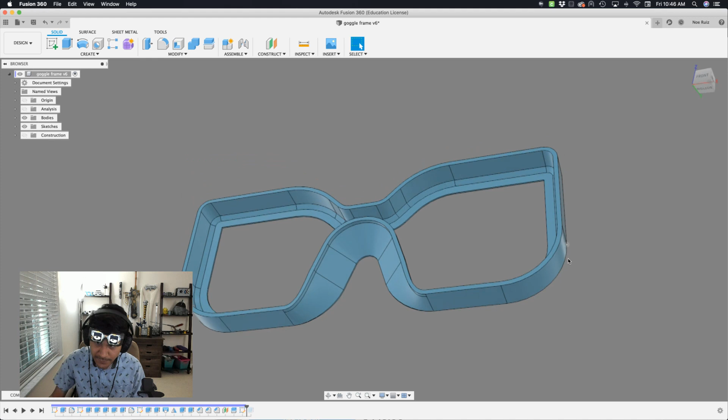So let's jump right into Fusion. All right, here I am. So here's the design that we came up with, and you can use this to create a pair of spectacles or an enclosure for a pair of eyes or something.

But you can see here I have some straight edges that's going to print flat, and then it doesn't need any support material because this is an angle where FDM 3D printers can totally handle it. It's at a 45. Really, really cool. So let's start creating our frame.

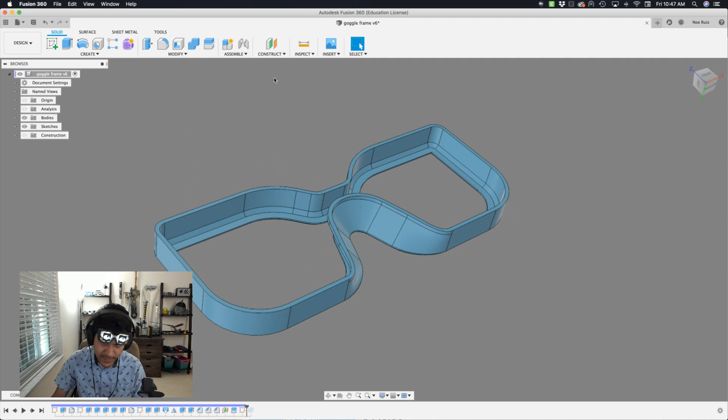So I'm going to start with a new design, and I'll go ahead and create a new component. Let's call it frame. And it's just going to be a single part inside a frame. Let's create a sketch, and I'm going to draw right on top using my top view, looking at it down.

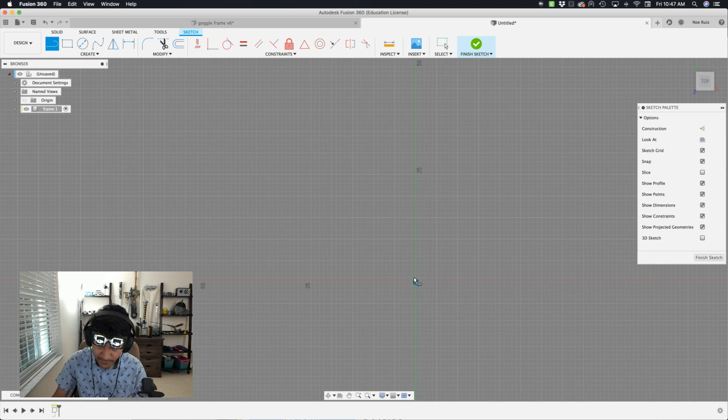Okay, cool. So I'm going to start with my line tool, and I need to sketch out half of our frame, so just kind of one. So I'm going to create a little construction line like that and make it a construction line. Cool. So now I need to create sort of this frame here.

So I'm going to start from here. I want it to curve up a little bit, out. Let's go something like this, down, across, over like this, and back down, and hit OK. So there are our lines, right? You can kind of see that it creates sort of a glasses shape.

So let's go ahead and start defining some edges. Depending on how or what you're designing to, maybe a human face, you might want to add something, maybe a canvas, attach a canvas so that you can have something to sketch on top of as reference. So I'm just adding dimensions here. You can add degrees as well if you want.

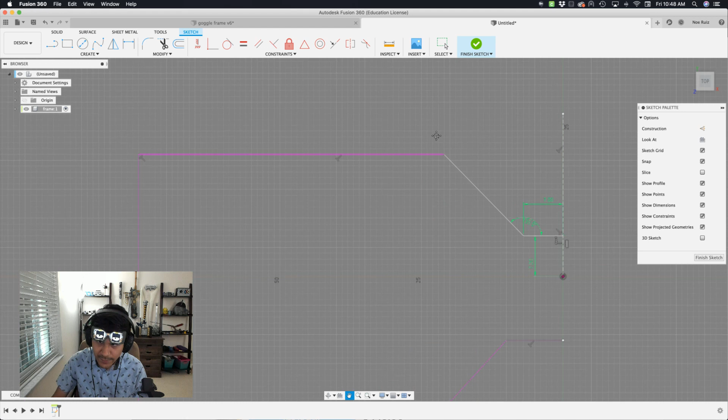And I am just saying, let's say I want - your constraints and your sketches are going to be completely different depending on whatever project you're doing. So that's always helpful to say. Let's make this 23, and what I'm trying to do is make it so that all these are...

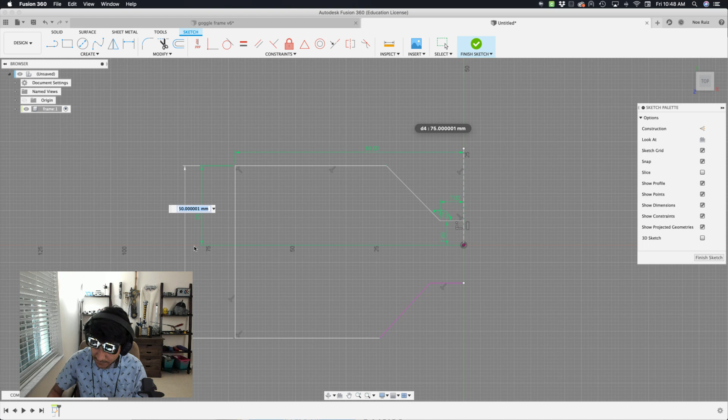Actually, you know what I'll do? I'll zoom into my design here, and I'm going to go to the first sketch that I drew, and I'm just going to reference those numbers here because I kind of want it to be the same. So what was I looking for?

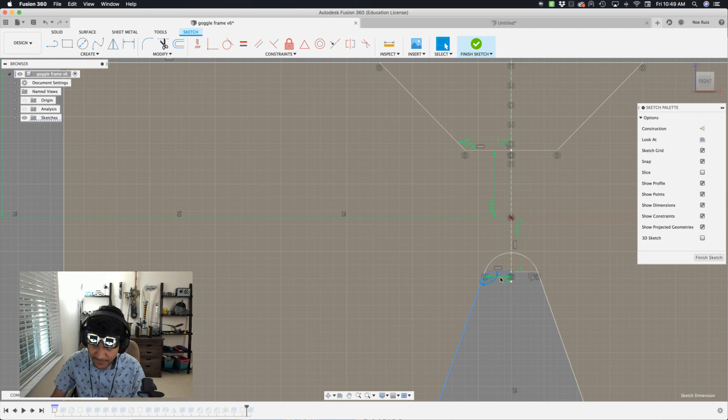Ah, I see. So what I'll do is, in order to attach this right there, I can use a line, connect those two dots, and then that line with it selected, I'll make it horizontal. There you go. Make it X, and let's bring this out to, I think it was 4.

Let's take a look. 8. Okay, the number is 8. So I'll say 8. Boop. Okay, cool. Looks like this can still move around right here.

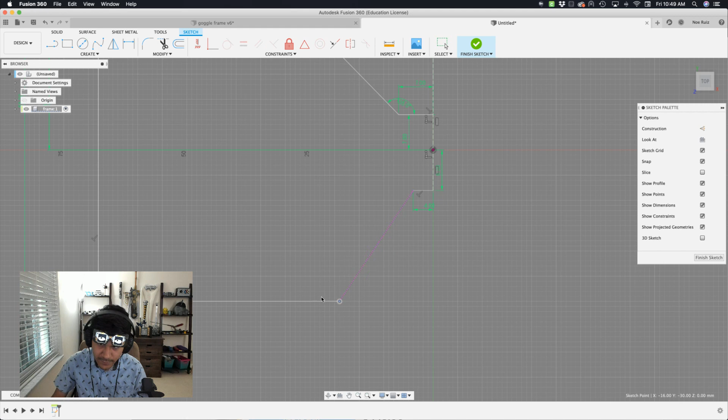So I'll apply that 110 degrees. 110. There we go. So now you can see my whole sort of connecting loop is now constrained. It's fully constrained, and I cannot move it because it's all locked and loaded.

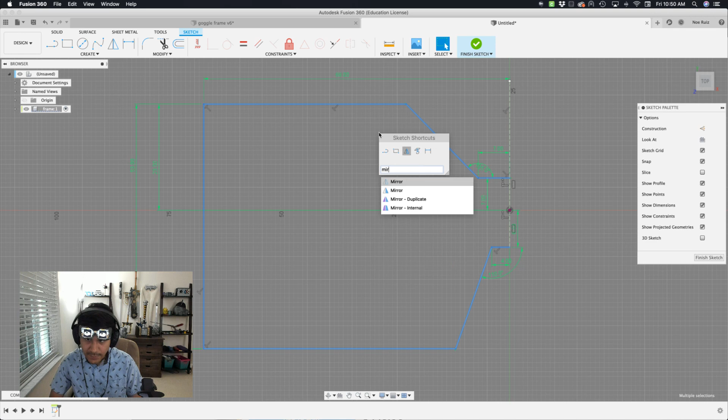So now what I can do is I could double click that and bring up the sketch shortcuts, and then type in mirror, pull that up, and then I have those already selected. So my mirror line will be any one of these lines going up and down.

They're construction lines, so I'll select that one. Get a little preview before you hit OK. There we go. So now I can select that. One last thing I'll do is I want to add a circle here.

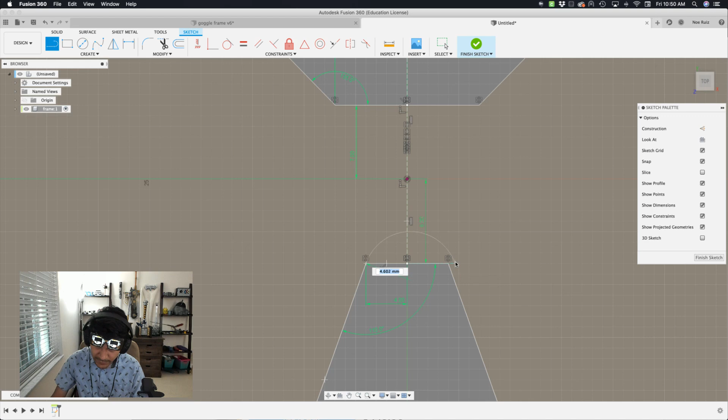One really easy way to add a tangent curve is to grab the line tool, click and hold, and drag it out until it starts curving, then drop it. I'm still holding the mouse button, then let go, and now it's locked in there. Both edges here are now tangent, so it's nice and curved.

All right, so now that I have my base shape, I'm going to extrude this out, and I want it to be 2 millimeters.

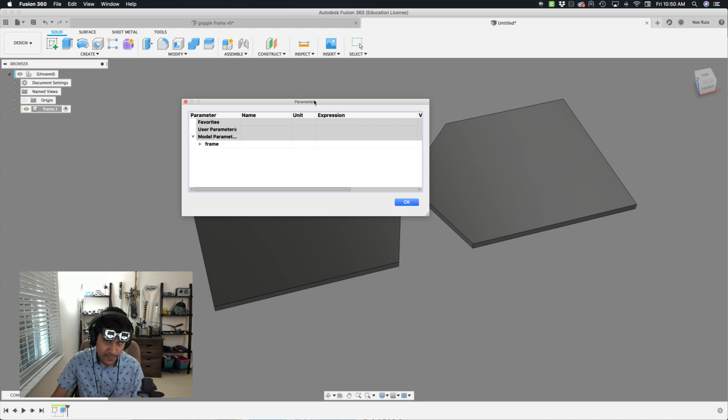At this point, let's bring up our user parameter window and start adding some parameters. I'll hit the plus button here. The first one I want is the shell, and I want this to be 1.5 millimeters—if you want it a bit thicker, you can change that. We also want to change the height of the frame; I'll make this 8 for now. That's really all I need right now.

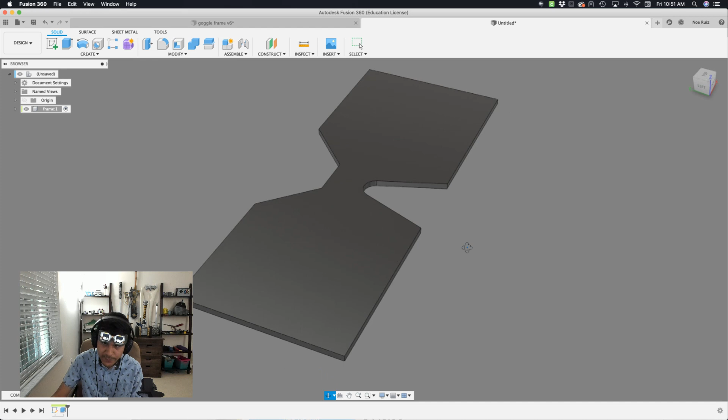Okay, so now I have this. You're wondering why is it so blocky? Well, it's because I premeditated.

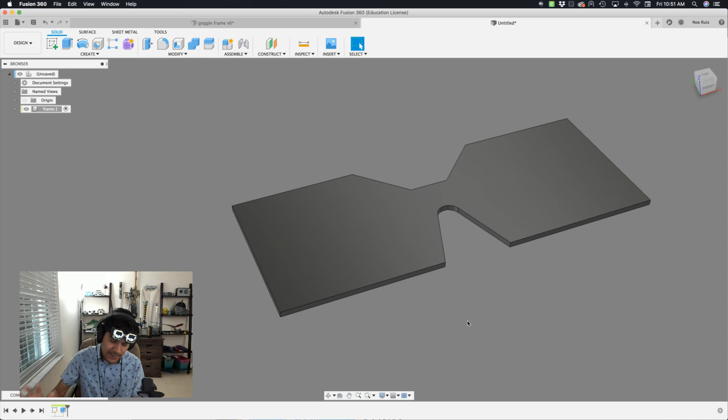I want to add curves and fillets, but not as a sketch. I don't like creating fillets inside of sketches because sometimes my dimensions go crazy. I like to make those fillets outside the sketch, in the extrusion, because I feel like I have more control. So I brought up my fillet.

You can add multiple fillets here. I'll start with the outer edges: this one and this one will be the most extreme ones, at 19.5—it's a pretty big one.

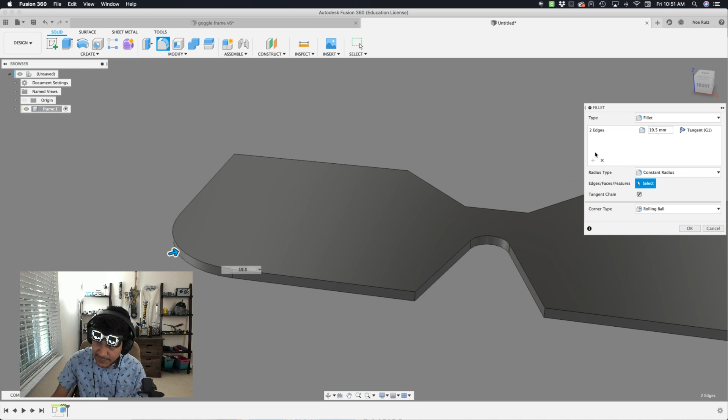Then I'll make a new selection and select these two guys here down near the lower eyelids, and add something like... let's do 18. I need a nice curve there. Okay, that's starting to look better.

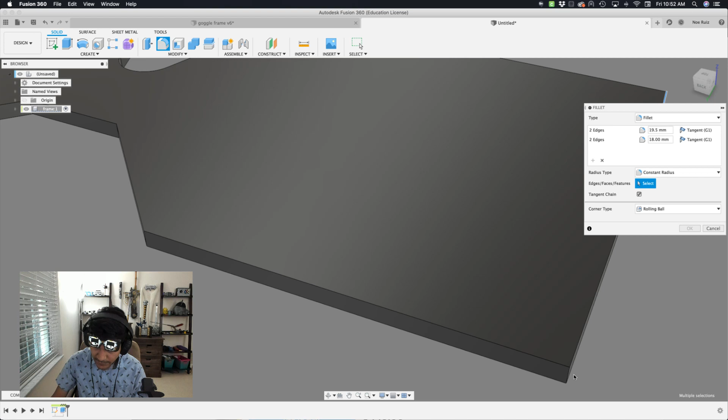Let's add some more selections on the corners here. I can add a small one on these two corners—why not these two over here as well? Make it all one selection. Let's say we want 4. There you go, looks cool.

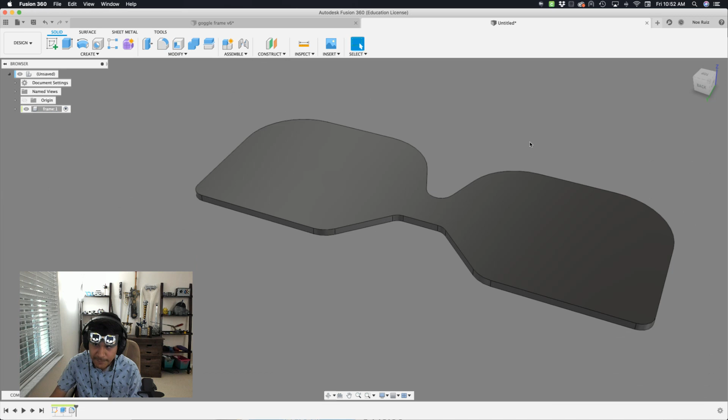For the last part, I'll add this right here, these two—we can double that 4 to 8. And there we go, hit OK. That applies it. Now I have this very cool solid here.

All right, so now what I need to do is create a frame for this. What I can do is make an offset. But first I want to show you, as a visual, how I'm going to get that tapered angle.

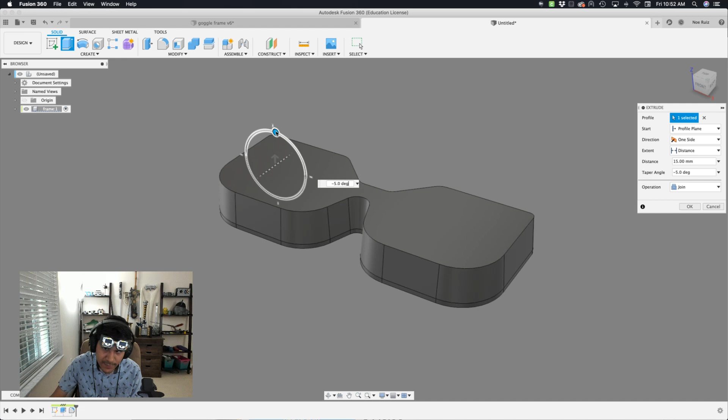The easiest way to do a tapered angle is when you're actually extruding. So if I start extruding this out, you can see I have this little handle here, and if I start moving it, you can see it's tapering all the edges. That's very, very useful.

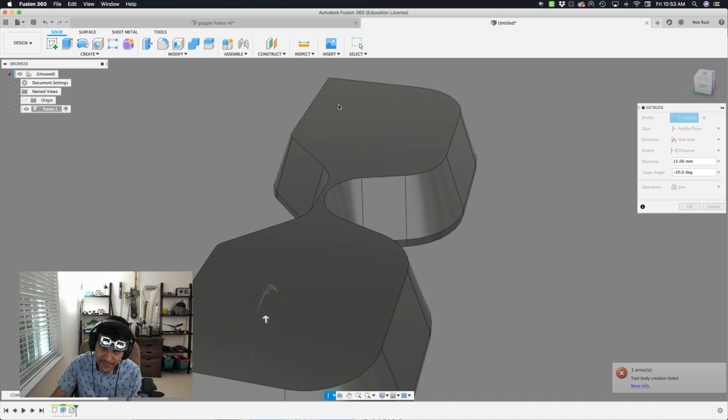But in some cases, some shapes, the extrude feature doesn't like to close in on itself. At a certain point, like 20 degrees, it won't let you do it because it's closing in on itself—you can see that right here in the nose bridge area and this top area. It's starting to intersect itself, so it won't allow us to do that. So how do we fix this?

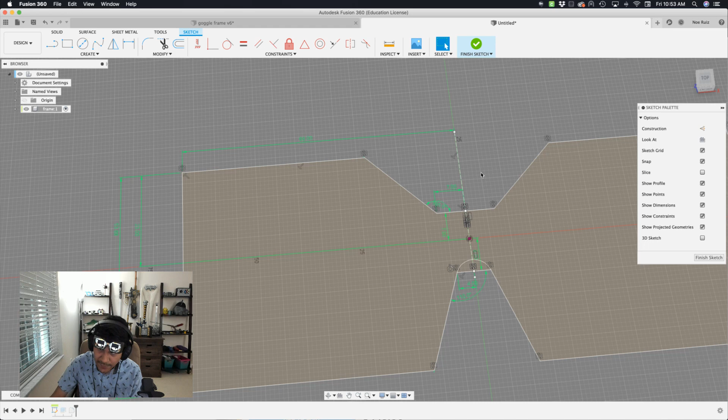Well, the first thing we want to do is modify our geometry a bit. So I'm going to go back into the sketch, and because I want this area to be curved, I can just fill this area in here, since that seems to be where it's intersecting itself. So I'll grab another line tool and connect this dot to that one there, and hit OK.

Now what I can do is go back into this extrusion, double click on that, and add this little top piece to my selection, hit OK. And there you go—now I have this area here.

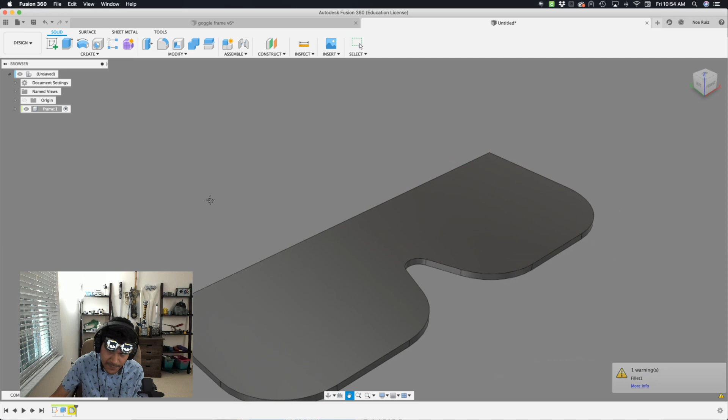Now the fillets got messed up because I added a new profile to it, so let's go back into the fillets and modify those selections. It looks like this edge here, I'll need to select that one there, and I think that's it—yeah, everything else is fine. So I'll hit OK, and that updates my fillet.

Now when I extrude this out, I'll select the top surface again and start extruding outwards. Now I can go all the way and do my 45 degrees if I want.

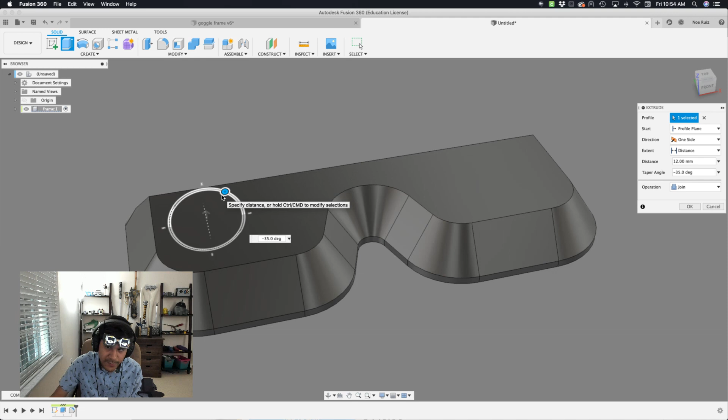I think I'm going to stick with 35 for now. You can see that that's working there. Okay, so now I can hit the accept button.

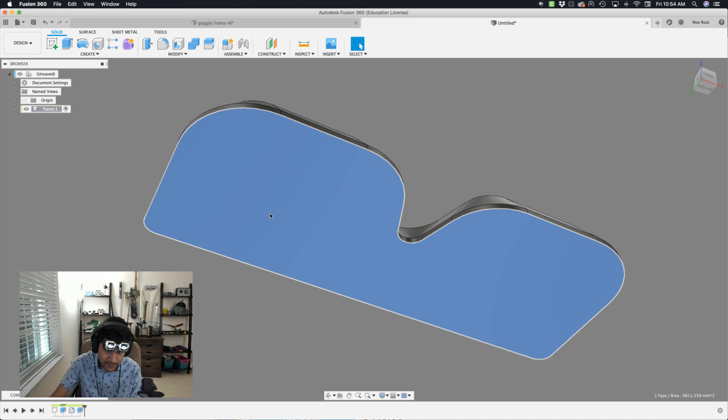Now what we need to do is create another profile that will cut away and leave us with a bit of a shell. So I'll come in onto this bottom, select that, and create a sketch right on top of it. Now I'll hit the letter P on my keyboard so I can project in a surface, and I'll project in this bottom surface, and it'll see it as one selection. I'll hit OK, and then I get that whole edge here.

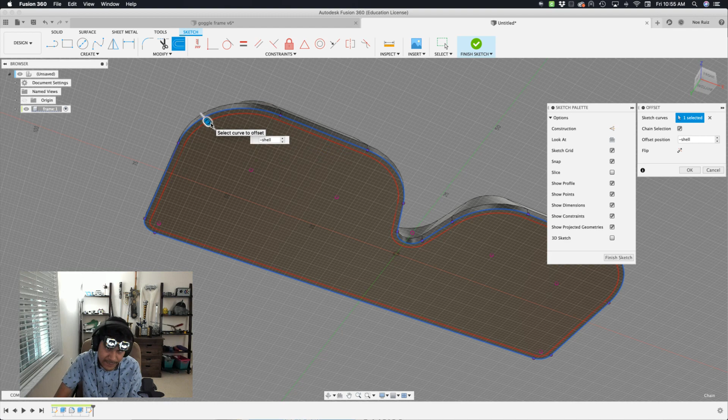Now I can use the offset tool and click that edge to bring it inwards. To bring it inwards, it's a negative value, so I'll put negative. Instead of putting a number, I already have shell set up, so I'll just type in shell, and that's going to be 1.5 because that's what I set it to. That's it for this specific spot.

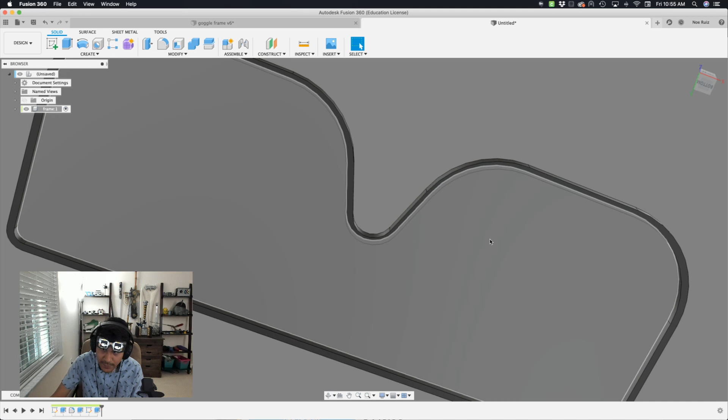I'll hit OK, finish sketch, and now I want to follow the way this is going. So as you see, go straight first for 2 millimeters, let's go -2, and that creates a cut there. As I go down, you can see, okay, cool, I'm following this straight edge first. I'm going to need that.

And then I can select that again, hit extrude, and then bring it all the way up. I'll actually say negative height, because that is the parameter we have set up. You can see I didn't apply it to our first extrusion. Well, I'll come back in there.

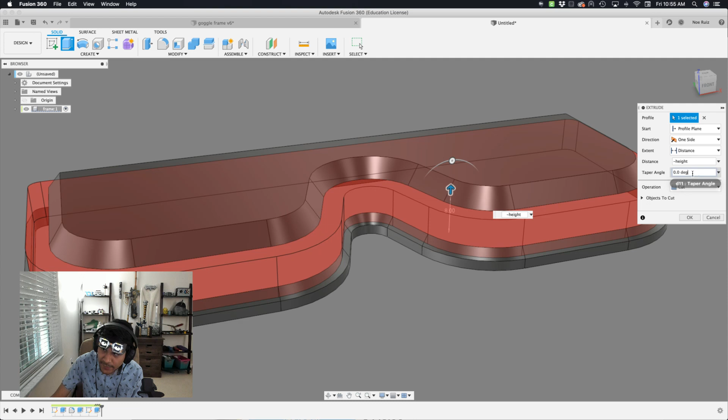And then for the tapered angle, we can add a tapered angle, whether it was, I think it was -30. Yeah, and I'll hit OK. Let's go back to this extrusion, our first one. And for that 12 there, I'm going to change that to height because that's our user parameter. Now when I updated that, you'll see that our other extrusion now matches with it.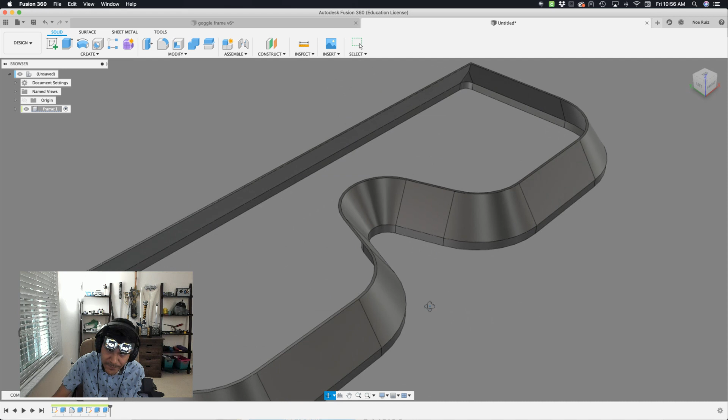So we get that. Another thing we need to get going is the degrees. So one cool thing is, let's bring up the user parameter window. You can actually create a user parameter for degrees. So when I hit the plus button, instead of millimeters, let's go down here and change it to angle degree.

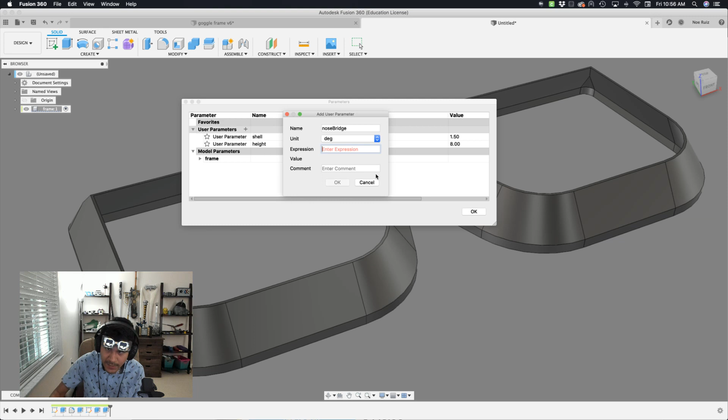Cool, so now I can say I want 30 degree, or maybe 35. Oh, that's the name. So for the name, let's call it nose bridge because that's where it is. And then we can put 35 here if we want. Hit OK. So now in our extrusion, where we're creating that tapered angle, I think it was the second one, right here where it says tapered angle, yeah, see it's -30. Let's put negative nose bridge.

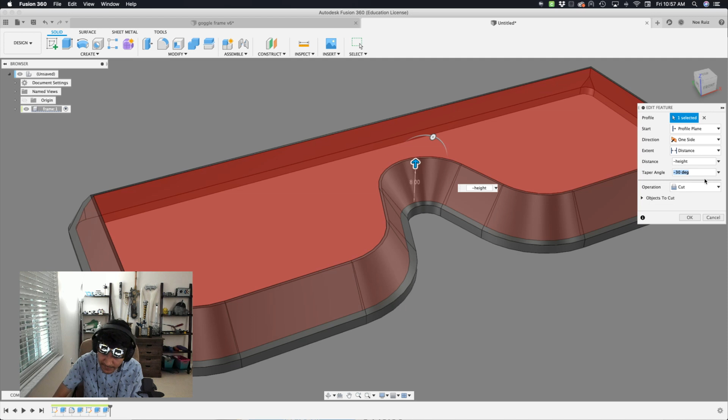That way we can change it. Now in our last extrusion, you can see that that's still a fixed value for tapered angle. Let's change that to the nose bridge, and now it follows it. And now this right here...

It obeys the thickness that we set for our shell, 1.5 millimeters. You can see here in the bottom distance, and down here as well, it should retain that 1.5 millimeter thickness. That's going to be really important when you are creating something that has very specific tolerances.

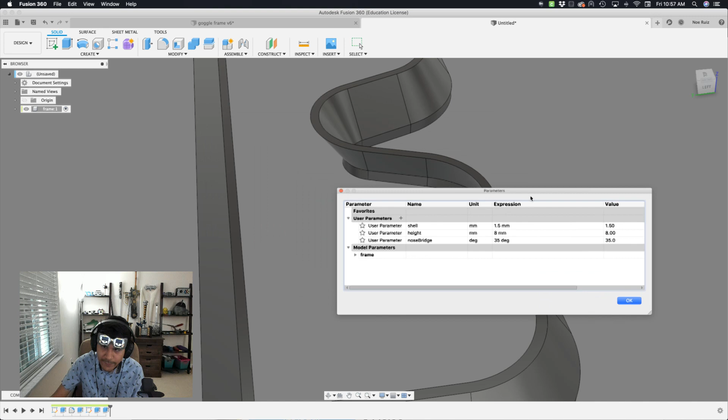So if I come in here to my user parameter window and update the thickness, everything gets updated with it, which is great. I'm going to go back down to 1.5. Cool, same thing with the height. If we want to go a little bit taller, all of that is updating with it because we set it up right. Let's change the degrees.

45 is pretty extreme, but we can do it. Let's go back down to 35. Okay, okay, well, we got our nose bridge area.

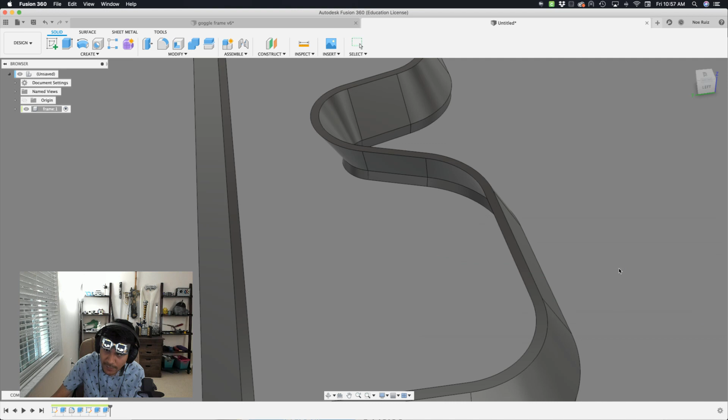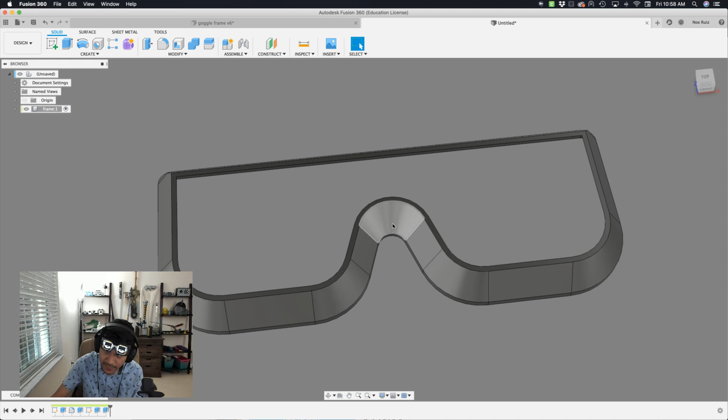Now, how do we straighten these edges out? Remember, I only want the nose bridge area to be curved, not everything else. So how do we do that? We actually create another solid. But first I want to create a new profile with a sketch that cuts away this area and only reveals this area. So we can do that by going back into the sketch here.

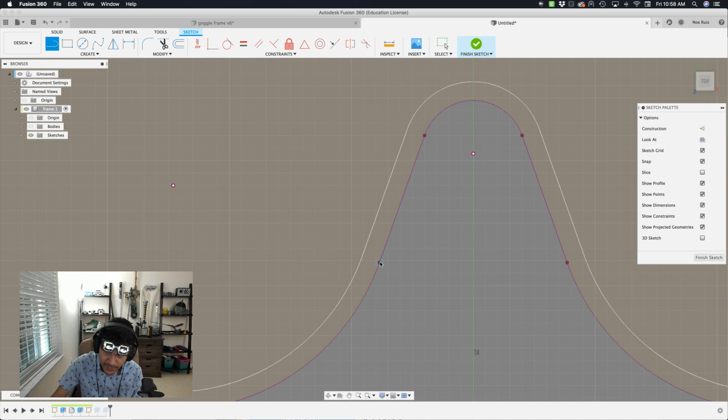I'm going to create some lines, so let's hide our body a second so I can actually see it. Now I'll connect some dots. I want the nose bridge to end right on this dot, and I'll go to this dot over there. It's at an angle on purpose, and you'll see why in a minute.

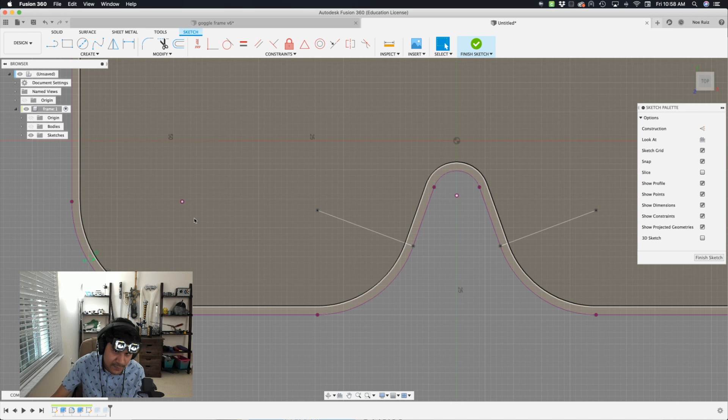Let's do the same thing on the other side, connecting this dot to that one over there. This dot here is actually the dot for this curvature — that's where it came from, a curvature dot. As you select it, the curve down there turns blue, letting you know that's where it's from. Every fillet area has those dots, just to give you an idea of where the center of that curve is. That's really helpful in this case.

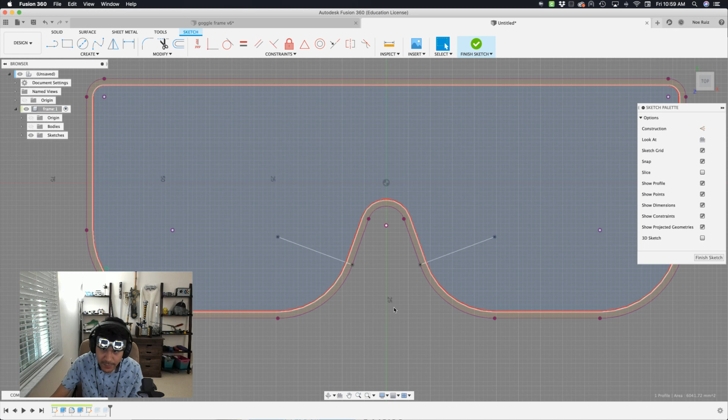Now you can see these lines create some cross sections, and that's exactly what I want. Another thing I need to do is create some lines that will connect — actually, I don't think I need to do that. Let's see. Yeah, I do need to do that.

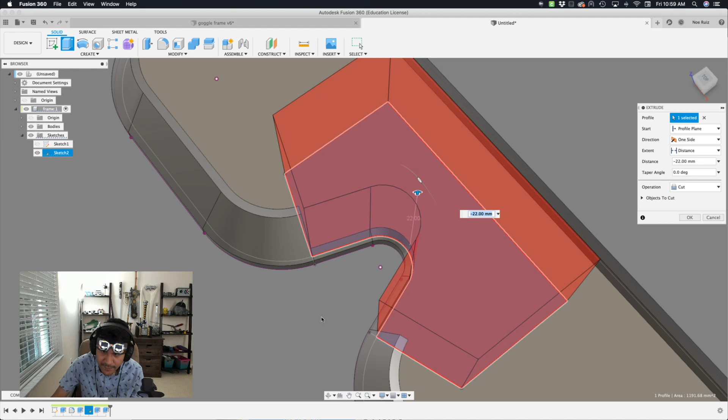Let's go back into the sketch and close this off as a square, so we encompass that nose bridge area. I'm just creating some lines that will let me make a selection to cut that away. Now if I bring back the sketch, I can select this whole area — oh, I also need to select the outer area. Now I can do an extrude and just cut it all away, as you can see there. Probably easier, I could just select this one area — well, that's two areas — then say cut, intersect, and it'll only leave what's intersected, which is that nose bridge area.

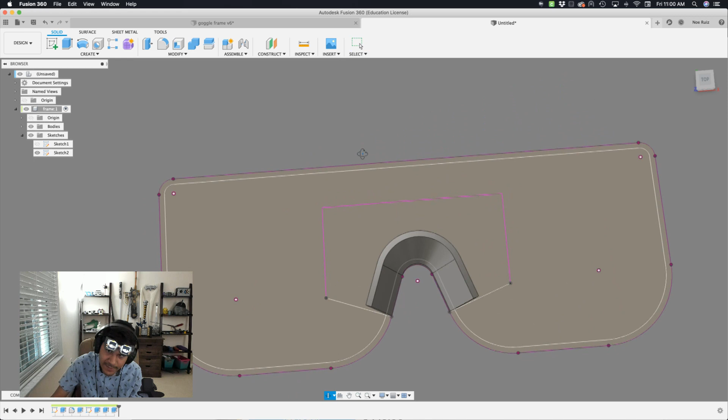So now I have my nose bridge. Now I need to create another body that will have that frame. But you'll notice I need to create that area here where the eyebrow is — I need to create that curve here. How do I get that curve?

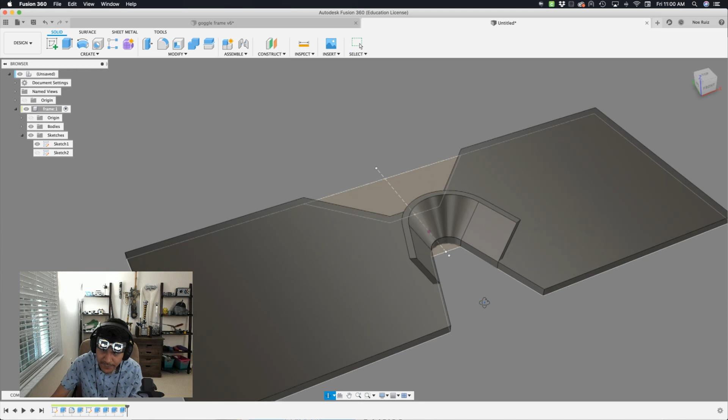Well, I need to go back into our original sketch and create yet another solid. I'll make this the same, following the same straight edge here — I think it was 2. It needs to be operation new body, so I'll hit OK. Now I kind of have to redo those fillets because of how I built it, but not too bad. I'll bring up the fillet tool again — this is a brand new body — and just add it to it.

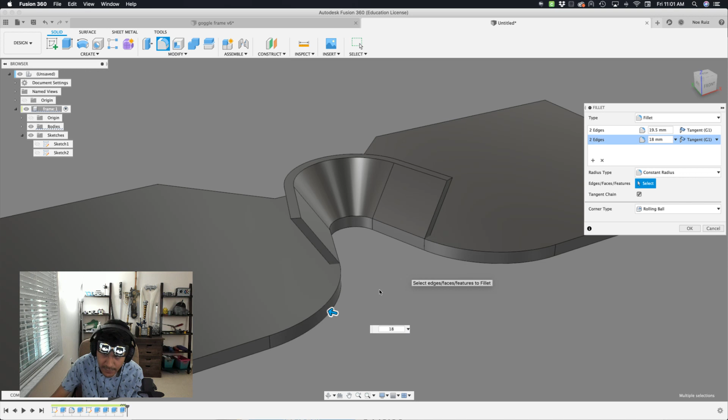I think it was 19.5 for these outer edges. The other selection had these two guys here. It's important to follow the same fillets for this case. This one was 18, I believe, and then these guys were smaller — the edges out here were 4, and these two were 4 as well. Then I think it was 8 on the other part here, this one and this one — should be 8, double the 4.

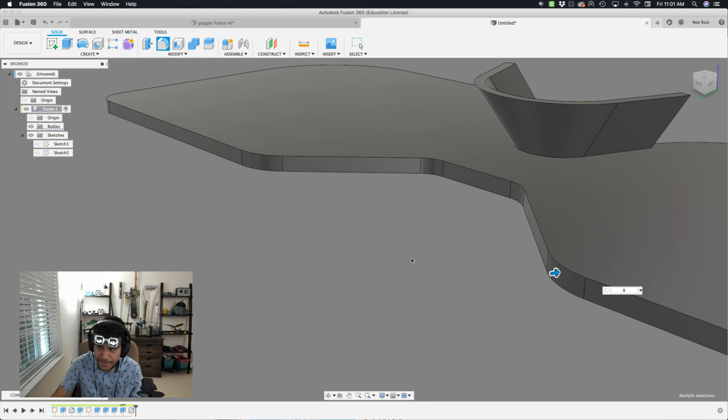Okay, cool, so now we have our full extruded cover. What we should do now is create yet another sketch. With that surface selected, I'll hit P on my keyboard to project in this surface, hit OK, and then do the offset — let's do the offset, negative shell. Hit OK, hit finish sketch.

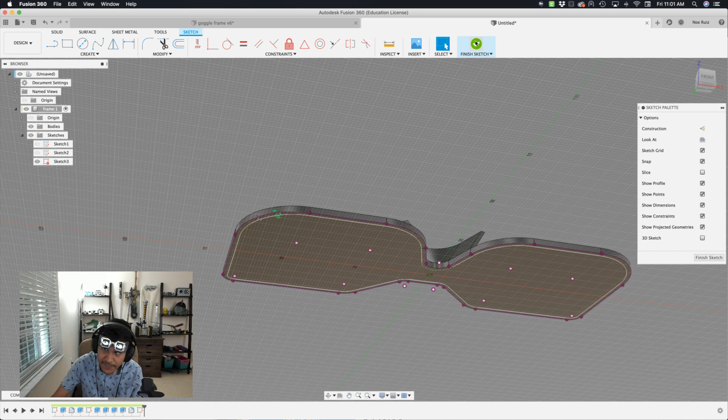Now I can just grab this extrusion here — oh, I need to cut this out first, so let's cut this out. I'll say extent, change it to object, and just select this top here. That way it's parametric. Hit OK. Okay, cool, so I got that now.

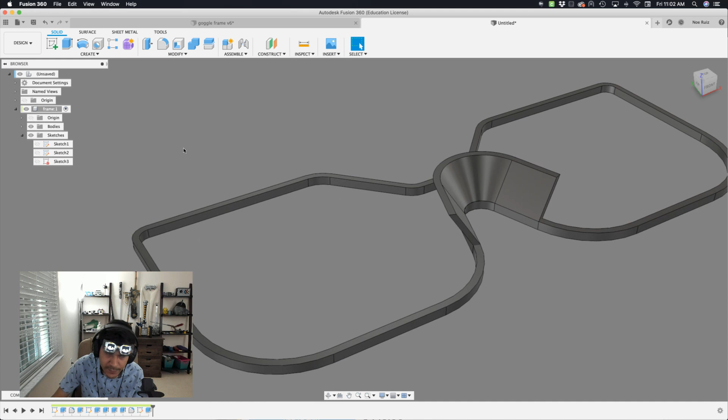What I'll need to do is hide the first body, the nose bridge area. I need to do the same thing I did with the nose bridge — create sort of a box that will cut away the nose bridge area. Instead of using this dot, I'm going to use this dot over here. I'll come over here, go across, and then go back down again. I need to make sure this is straight, so I'll apply a horizontal constraint like that. That's looking good — this doesn't need to be defined, I just need something that will not allow me to extrude that. Now that I have that, I'll hit OK.

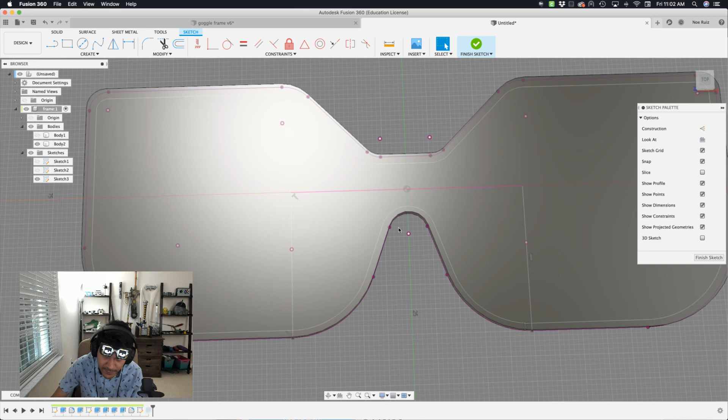Now I can select this guy here and then just extrude that out, cut it away. So now I have this frame. If I bring back body 1, we can start seeing our 2 bodies.

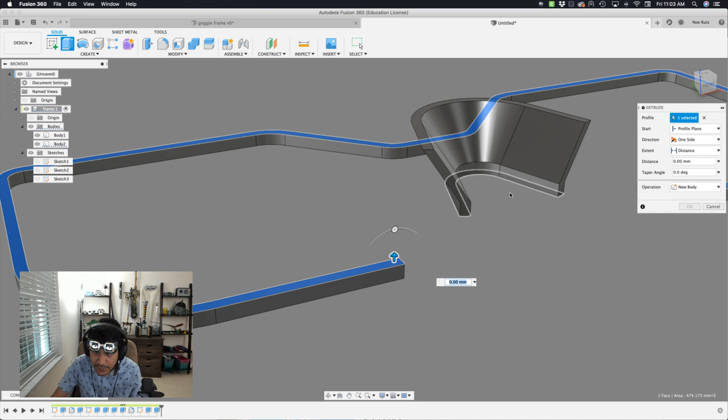Now the other thing I need to do is create some more extrusion here. So I'll hit extrude and extent, say to object, and select the top of that nose bridge area. That way it's parametric - whenever I change the height, both of them will change. We can test that by bringing up our user parameters, setting height to 10, and they both go with it. Let's go back to 8, hit OK.

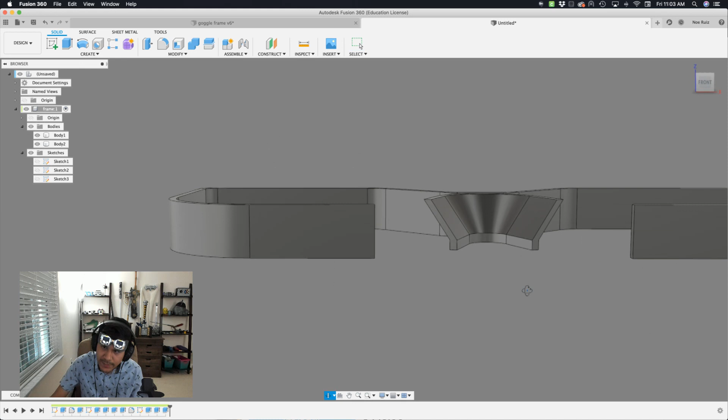Now all we need to do is create a transition between this surface and the other one that's straight. So how do we do that? Well, I already have them selected, so let's just apply a loft. The loft tool is awesome, it does great things, so hit OK.

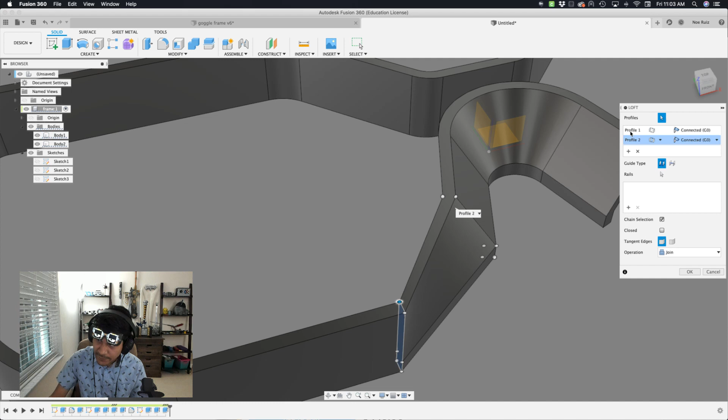Now by default, you notice that it looks terrible, and that's because there's no curvature being applied to them. You can see the 2 profiles. There are some options here where it says connected. You can change that to tangent, and that'll make it tangent, which is great - it'll curve it out and be real nice.

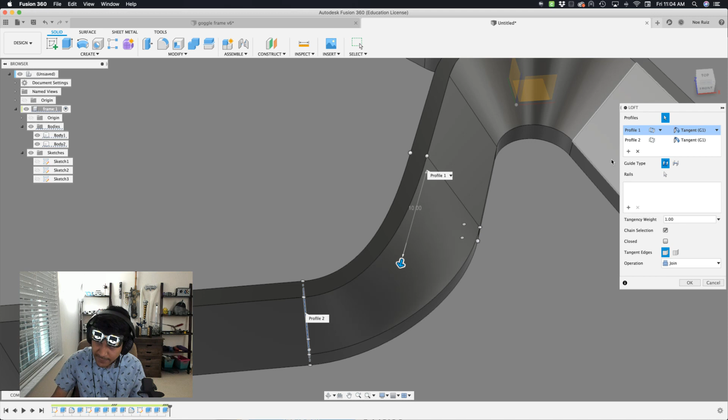If that doesn't look good to you, you have these extra handles that allow you to add more weight, more curvature to it. So if you want to push it out, each profile can have that - you see it's 10, click on that one. This one's also 10, you can do that over there too if you want to curve it out more. I'm going to leave them both default at 10. It's important to note that those values aren't in the properties window - they only get shown here in the canvas. I didn't know that, so I thought I'd let you know.

But that's looking pretty good. Just adding that tangent and knowing about the weight is going to make you go a long way to create these really nice and seamless tangent curves. So I'll hit OK - that's really all I need to do there.

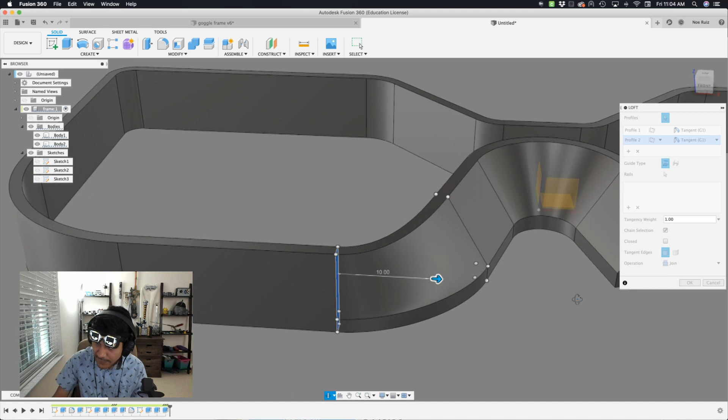To do it on the other side, we can just use a mirror. Make sure our pattern type is set to features. Then I can select that loft in the timeline, go to mirror plane, and select this plane. Everything's symmetric, so it just works out fine there. That's pretty much how you can create a nice transition between surfaces.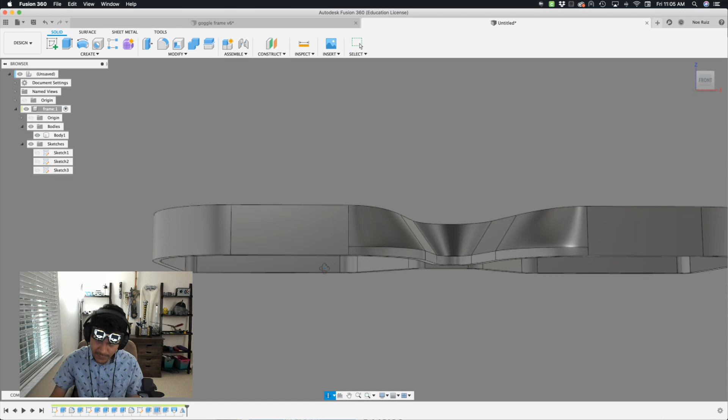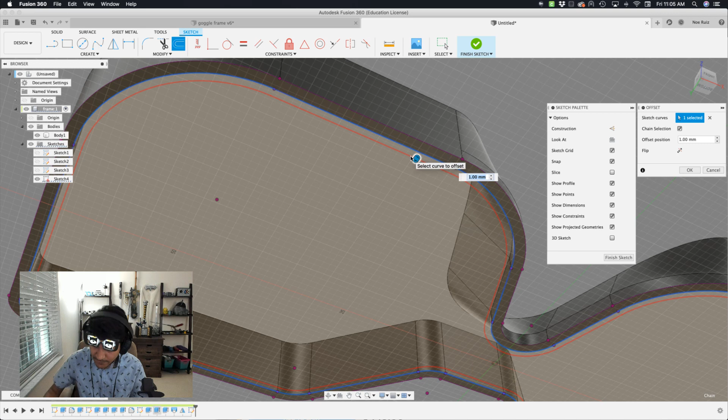For this example, you want to keep the same contour, so when I extruded it flat here, I made sure the values were the same. Now at this point, you can create some more things - let's say you wanted to create an offset here. I can create another sketch, offset or create a projection, and then offset this out. Maybe do a shell - now I can add this, extrude this, and add it to this piece here.

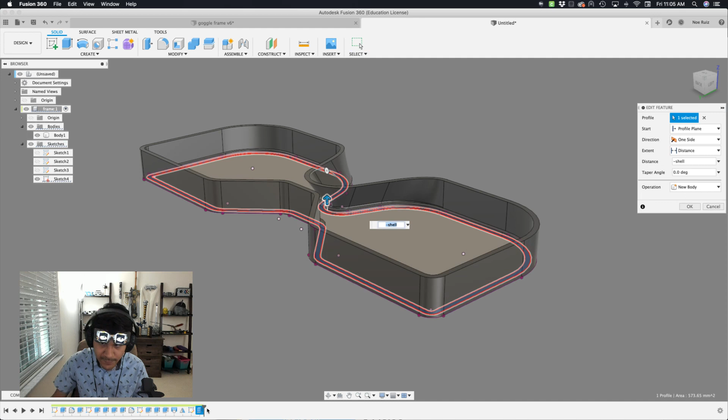Maybe say 1.5 negative shell, hit OK. That way I have a little bit of a lip area if I wanted to put something in there, and I could even chamfer this edge out if I want. Actually, I think that was a new body - yeah, I want it to be join. That'll join to that. Now I can apply a chamfer here, maybe one, like that.

You can keep adding to it and stuff. Let's say you wanted to round this out - we can say fillet on this edge here, maybe one. Yeah, and then you can round it out. That's looking more like goggles.

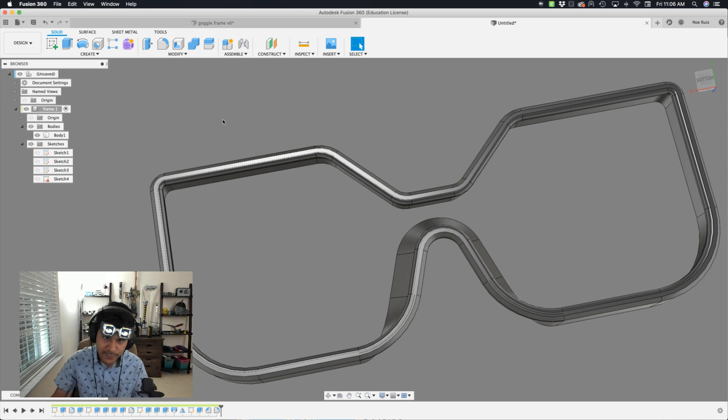Very cool. So then at this point, you can start creating all the arms or slots for things, and it's all parametric. So I can come in here and if I want a more extreme or less extreme angle, it'll just update there like that. That's really cool, and same thing with height.

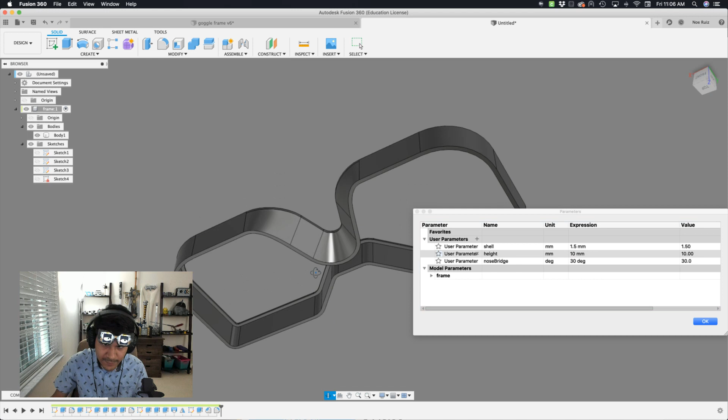If I want to go down to 6, you can make it thinner. Go back to 8 or 10, make it thicker. That tangent, that loft, might need some tweaking as you update values when they get really extreme. So just keep that in mind.

If you wanted to change the fillet, you might want to add another thing to it, because it looks like I have to do it in 2 places because of the way I had to build the nose bridge first apart from the frame. But that's just the way I created it - you could create it in some other ways too, but that's how I would do it.